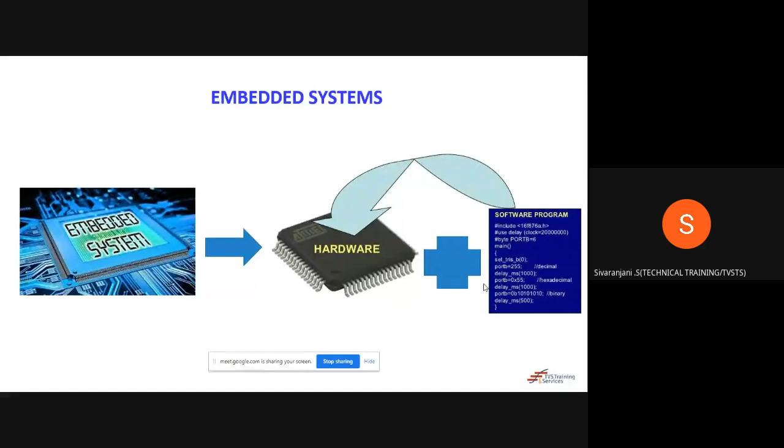So once we are getting into the embedded system introduction, we know how the embedded systems should function and what components should be present. The major important components of your embedded system: it should have an input, which we receive from the external environment via sensors, switches, anything. It can be a physical activity or an electrical activity, whatever it may be.

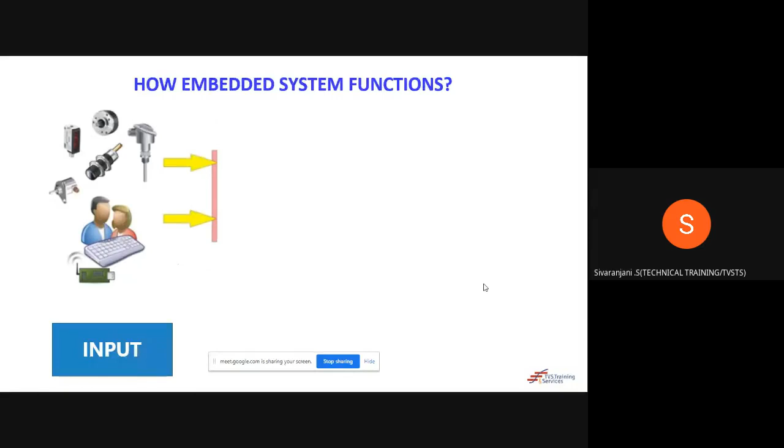The next step is the process element, which is your microcontroller, performing only dedicated tasks. Whatever input you receive from the external environment is given to this process element, but it will accept only electrical quantity. So the physical quantity from the external environment has to be converted into an electrical quantity, and only then given to the microcontroller. It is a semiconductor device, as we are all aware.

But because this semiconductor device will accept only a 5 volt voltage, that is a DC volt. So that is your microcontroller.

The third major functional part is going to be your output. The output can be any indicators. It can be actuators, it can be a display indicator, it can be anything. So you have an input from the external environment that needs to be processed via the microcontroller with some of the embedding elements, and that will provide you some of the indications as the output. This is all about your embedded system functions.

So can any one of you list some of the examples based on this explanation for embedded systems? Whatever we are undergoing in our day-to-day life, some may be examples of embedded systems. Can any one of you share from the participants' end? The electronic gadgets which we are using in our day-to-day life, which are based on embedded systems development. So can anyone of you share?

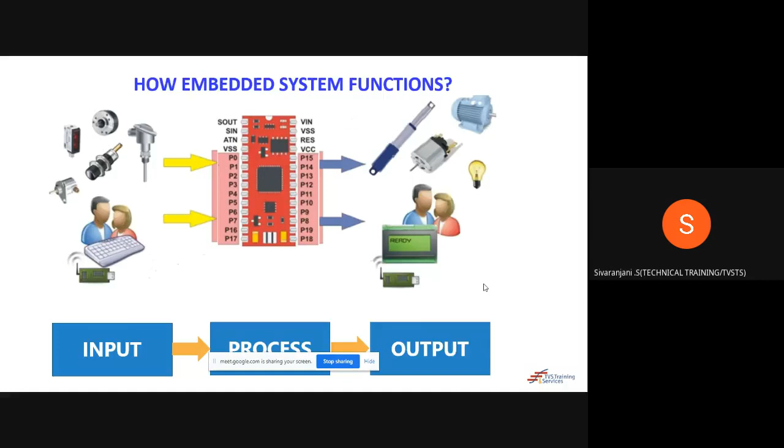So, for example, if we take one of the examples which you have given us, washing machine. When we compare this with the previous explanation, how will the input, process and output function with respect to a washing machine? What is the input you require for a washing machine? You require water, you require clothes, detergent, and the major thing is electricity. I have all these external environments with me, but what needs to be done? It needs to be processed, right?

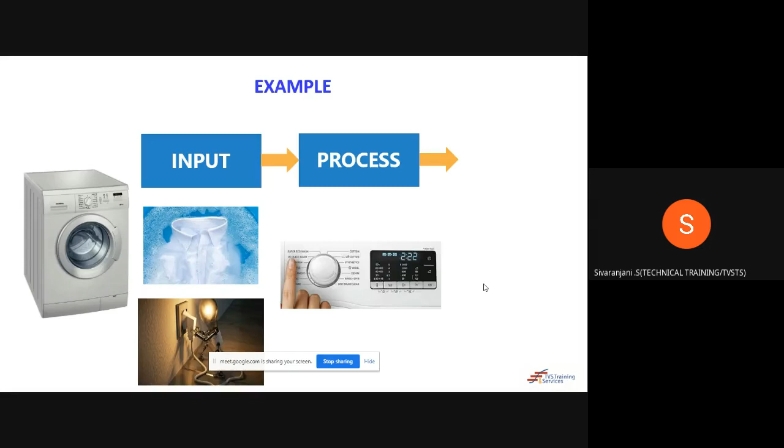So in the processing stage, that depends upon the input you are giving to the machine. For example, what type of cloth I am going to give. Based on that, I'll be setting up the mode, right? So the process element will take care of these things. If you're going with a cotton cloth, you will be going with some other mode. With respect to that mode, it will define the temperature as well as the time period it will take for doing the process. So all these things are under the process element.

So the microcontroller will take care of this selection. Whenever I'm going with knob switch mode 1 selection, it means it is going with cotton cloths. If I'm going with 2, it is going with synthetic. Maybe cotton cloth will require some more time to wash, but synthetic doesn't require that much time. So the process element is going to be the best judge for you. You have written a lot of codes, we will call them instructions, for different tasks. So according to your selection, you are going to process the functional part. That is all about your process element.

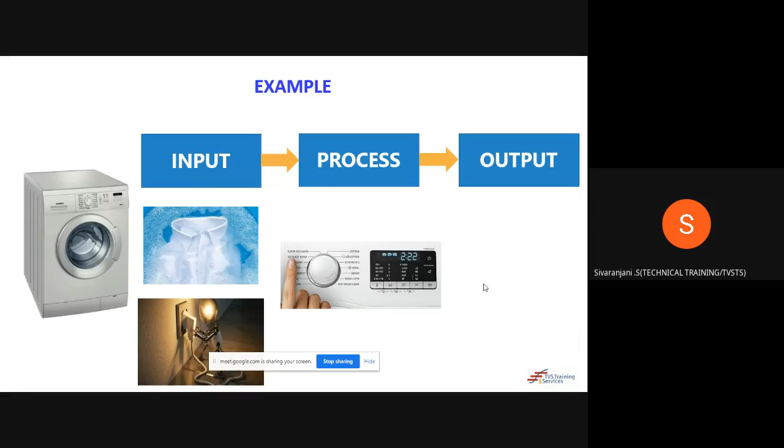And what is the output you will be getting from this? You will be getting washed and cleaned clothes from the washing machine. That is your output. So this is the best explanation for your embedded systems, how it is functioning, how the input is taken, where the processing part is done, and what is the output you will be getting. I hope you got some explanation about this.

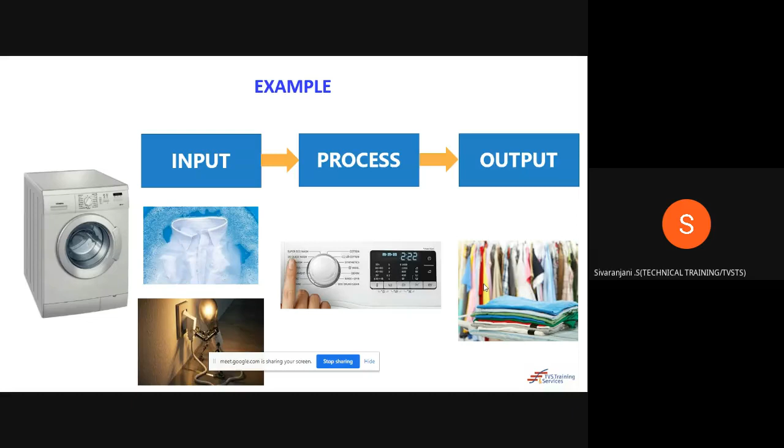Let's get into the design part of it. We know what an embedded system is, how it is going to function, what are all the major blocks in this. So now what do I need to do in order to make a system like this, how am I going to design it? The very major part of the design aspect is you should not design the system like a general purpose computer. Like a laptop or computer you have, that is developed for generic applications. Any sort of software, you will be able to load into it and work on it, right? But if your system is dedicatedly designed for a particular function, it should be performing that function alone, right?

So we are talking about embedded systems, which are for dedicated applications. When you are going to design a system, you should keep in mind it should not be a general purpose system, it should be a dedicated purpose system. So in order to go for this dedicated purpose system, what are the two things you need to talk about? We already talked about an embedded system being the integration of your hardware and your software. So these two things have to be designed, not independently, but dependently. One is dependent on the other. That's why we say hardware and software should be co-designed. So I'm not going to take a software environment which is independent of hardware. I'm going to select a hardware.

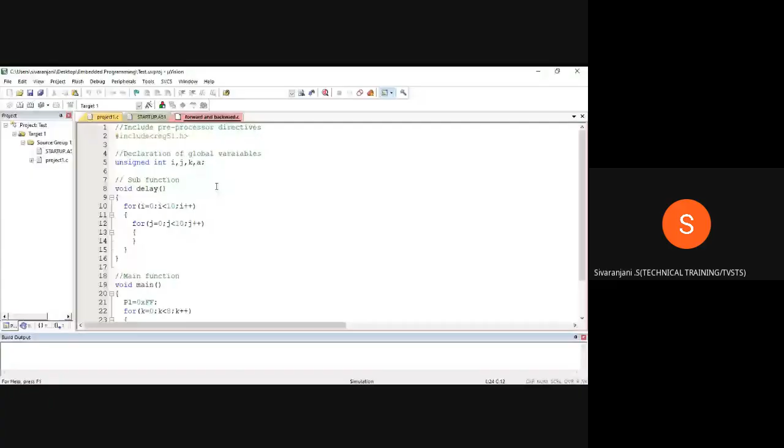Hello, ma'am. One second, ma'am. I'm taking it from the software itself. Maybe that will help you, because they are not able to see. Somebody is presenting. Can you please stop it? Mr. Thirumalai, can you please stop it so that I can present it? Thank you. You are able to see it, ma'am, now? Yeah, we are able to see, ma'am. Okay. Thank you. I'll just add the file again and show you again. So how are you going to shift it?

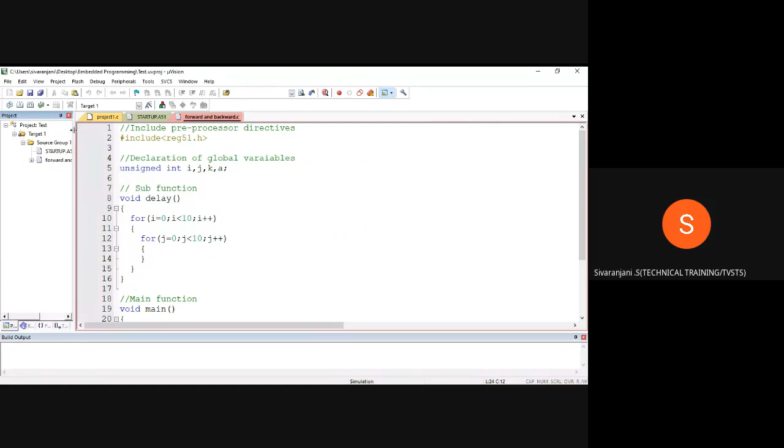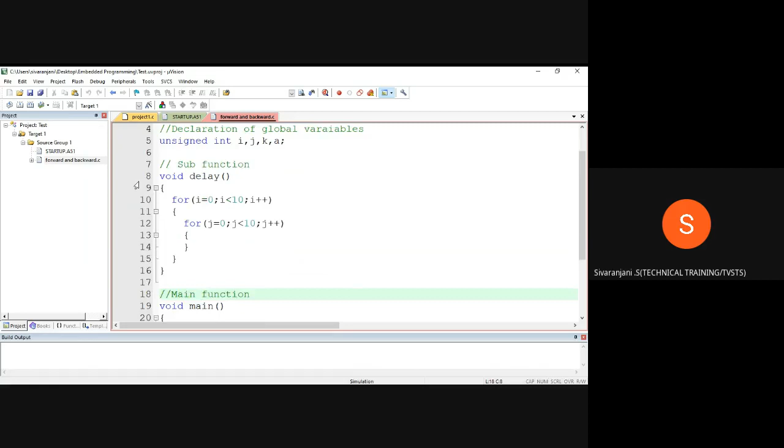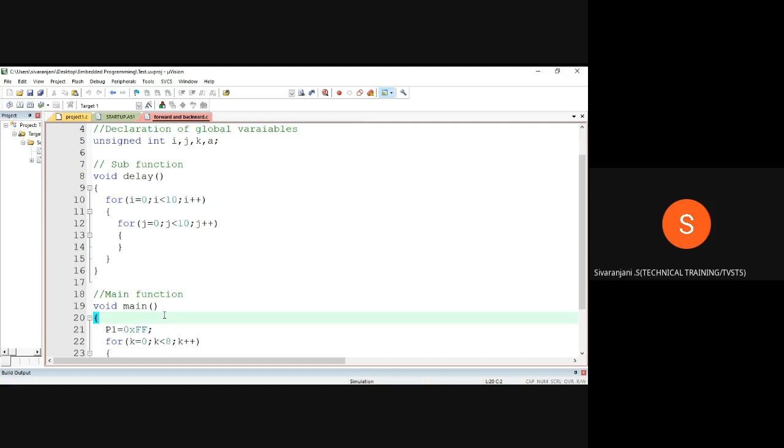See, I have added this forward and backward file. Whatever file I have added here, you are able to see it. So it is about the delay function. After the delay function, I am having a main function. So here it needs to be shifted, right? So I'm going to debug this particular program.

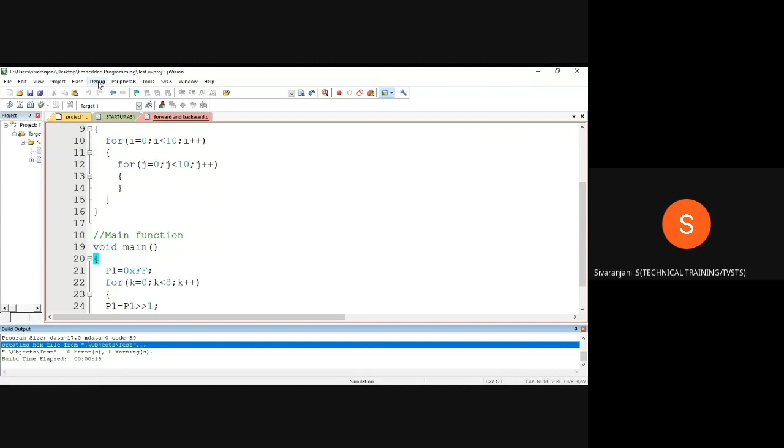I have rebuilt it. Yes, it was compiled, linking, and it has created a hex file. You are able to see it has created a hexadecimal file. Now I'm going with debug session. Debug port 1 alone I have taken. Are you able to see it clearly now? Shall I zoom it? Yes, ma'am.

Okay. Now I go with step over. The statement which was executed was P1 = 0xFF. So the port 1 is in 0xFF. Now the for loop needs to be executed. If I give F10, the for loop was executed. This particular statement was not executed yet. Now it needs to be executed.

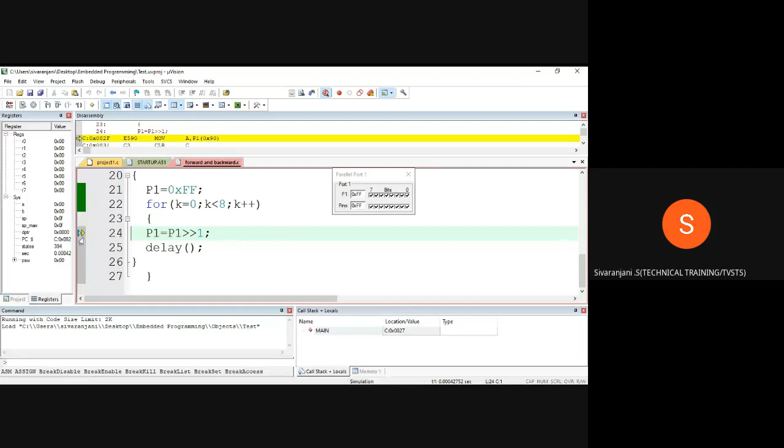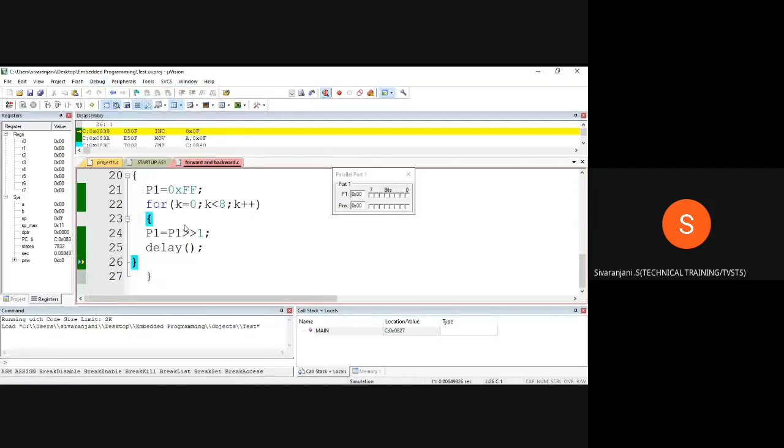Once it was executed, one bit was in off condition. If I go again, the second bit will be moved. Third, fourth, fifth. So bit by bit, you can make it on or off. That depends upon the programmer. For example, if I give 0x00, I'm making it 0x00. So what will happen? Just see. First, you need to build the target. Once the target is built, you can go with the debug session.

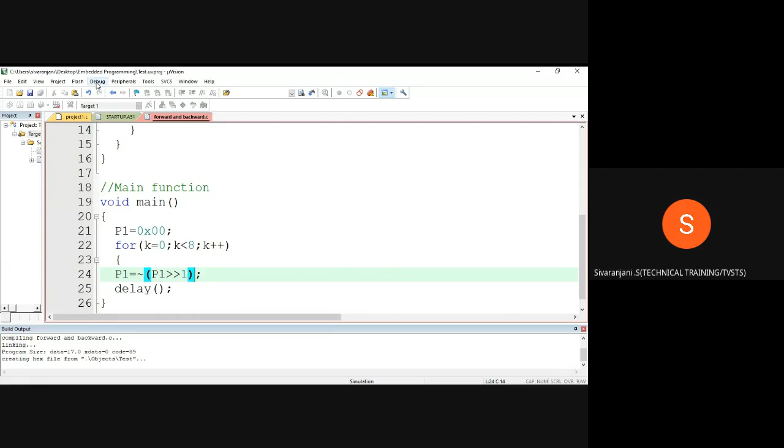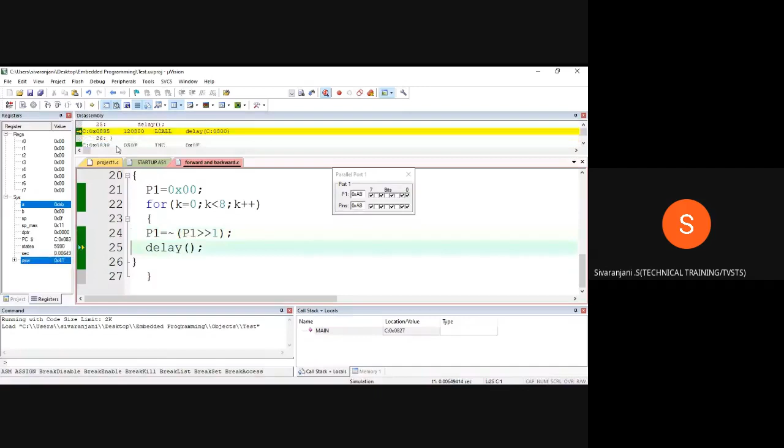And here I'm giving whatever is not there, that will be converted. Compiling, and after compilation, it has linked. Now the hexadecimal file will be created. Now I don't have any errors. Now I go with debug. The same thing I'm going to execute. Step over, F10. You are able to see bit by bit. A difference was there, right? So you can simulate whatever scenario you require, according to your requirement. So this is how you can debug with the software environment.

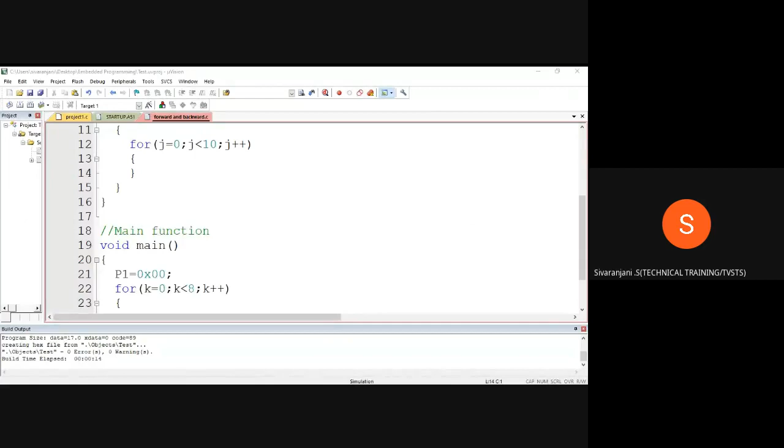So I'll go with the presentation again. Is it okay, ma'am? Somebody said it's not visible. Now is it okay? Yes, ma'am. Very clear, ma'am. Okay. So shall I go ahead? Yes, ma'am. Is the PPT visible, ma'am? Yes, now.

If I have a scenario like this, I need to design a system for a traffic light control. What needs to be done? How many inputs are required? How many outputs are required? If it is a 4-way road, how many signals will you have? 1, 2, 3, 4. So 4 roads. So you'll have 12 LEDs, right? Each lane will have 3 LEDs: one for stop, one for slow down, and one for go. So 4 into 3, 12 LEDs are required.

Each port will have only 8 pins. Then what will I do? I'll go with the second port. Port 0, if I take 8 pins, the remaining 4 pins I can take from port 1. That depends upon the hardware; the software engineer decides from the hardware diagram received from the hardware engineer. According to the hardware requirement only, you are going to write your program. So now, how to create it in a simulation virtual environment.

Ma'am, you haven't shared your screen yet. That's what I asked, ma'am. Is it clear or not? One second. Okay. Is the screen visible now, ma'am? Yes, ma'am. Now it's there.

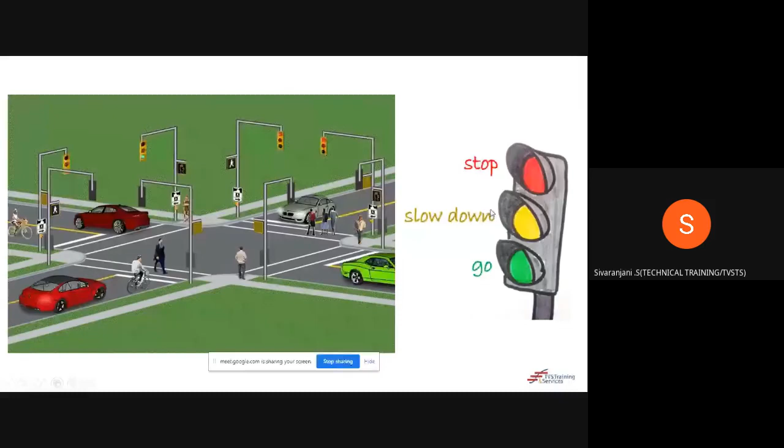So I talked about this. You will have a 4-way road consisting of signals. Each lane's signal will have 3 LEDs. So totally 12 LEDs are required. How are you going to design it? Previously I talked about how to simulate with the IDE, integrated development environment, and how to debug it. So now your program is ready and you have simulated it in the programming environment. Now, how do I check with the virtual environment?

For this example, I have taken this virtual environment, because previously you learned how to debug and how to code your logic; everything is done there. Now we are getting into the virtual simulation tool, which is Proteus. So how am I going to do it? I have taken just a 1-lane example, because I don't have enough time to explain all 4 lanes.

So where to get it? We have to pick from the libraries. In this library, you have to select AT89C51, which is the controller. So I have selected that. I'm going to give OK. If you give OK, it will be added on the left side of your screen. You are able to see it.

Now, after that, I require a traffic light. So I'm just giving traffic light. The traffic light was selected, which has 3 inbuilt modules in the virtual simulation tool. Both of these are now added to my module. Now I just have to drag and drop here. I'm just taking the traffic light, dragging and dropping it here.

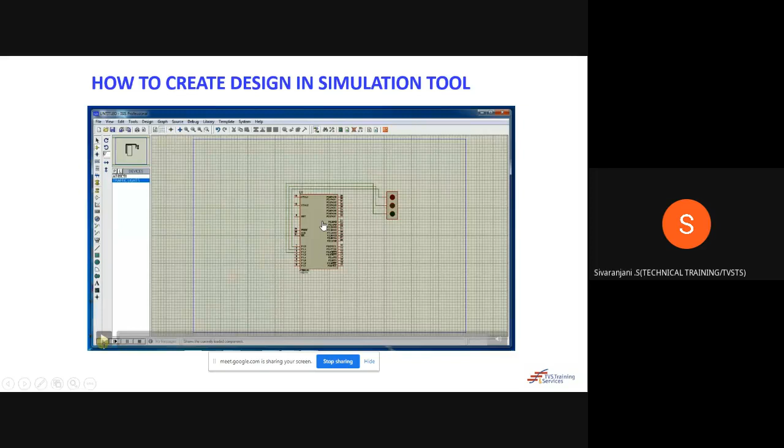Now, after implementation and virtual demonstration, once you are ready and everything is okay, you can go with the proof of concept demonstration. This is how you have to demonstrate it. You can take all these parts and demonstrate it with the proof of concept kit. After it is done, you can go with the realistic design of the system.

I hope you are able to see the difference in the different lanes. Lane 2 is in green, so they can go. Now lane 3 will change to green and the others will be in red. This is how your system has to be proved. This is the design and your implementation part.

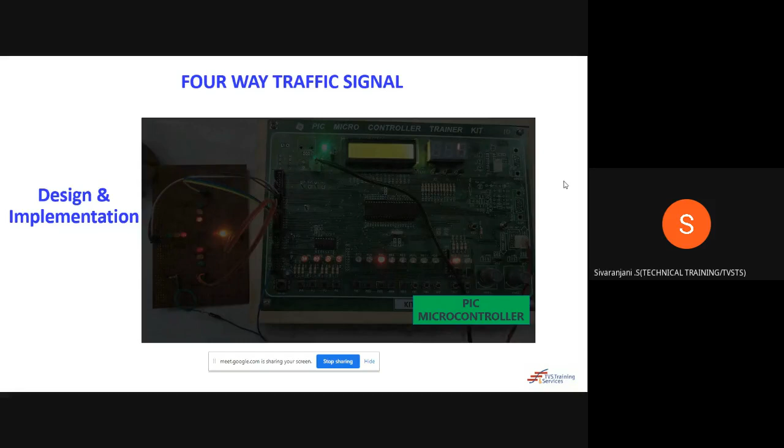Now shall we go to the Q&A session? Kalimani ma'am, can you please help me in getting the answers? How do you represent comment lines in programming and why is it required? Option C, ma'am. Thank you, ma'am. I've posted option C. Thank you, ma'am and sirs. Thank you for your answers. So it's C.

The second question: embedded programming is independent of the hardware. Is it independent of the hardware? False. Many of you have given the answer false. Thank you. False is the correct answer. And the next question: how many options are available to declare a variable in C programming? How many options are available to declare a variable?

Option A, ma'am. They have given option A, most of them. No, it's not option A. It should be option B, because your variable can be a global variable or a local variable. Any one of them is possible. So local variable or a global variable. So its answer is B.

Thank you. And the last question is, what kind of extension file is to be loaded to the microcontroller? Please post your answers. Option B, ma'am. Most of them have posted option B. Option D, last option. D. Yes, yes. Thank you. So it should be a hexadecimal file, but we are writing it in .c extension that will be converted into a hexadecimal file with the help of the compiler which is present in the integrated development environment.

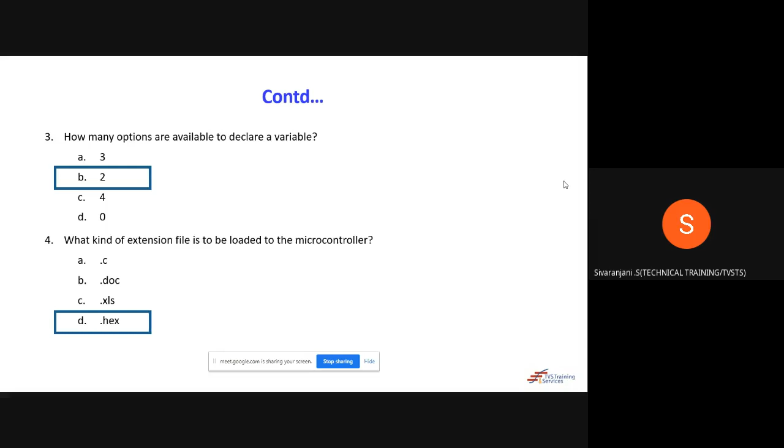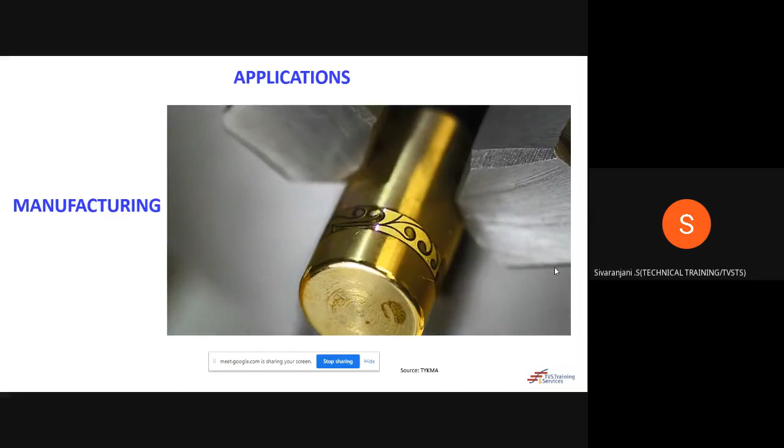I hope from this video you have understood how embedded is contributing to manufacturing applications. Manufacturing industries are using embedded programming for their applications also. For example, if you take the automotive industry, they are using this laser technology for printing on the rim as well as on the switches also. These are all automotive parts which are prepared with the help of embedded by the use of laser technology. The laser light is controlled with the help of embedded systems: when it should be on, when it should be off, what intensity it requires. So all these things are taken into consideration, and this technology is used in the automotive industry.

The same laser technology is used in packaging applications also; you will be able to see some of the components here with some packaging parts. These things which are printed have to be a permanent marking. It should not be temporary, like what you see on your keypad mobile. When you use it for a long time, what will happen? The printing on the keypad will go off. This is because it is based on screen printing technology. But if you go with laser, it is going to be permanent.

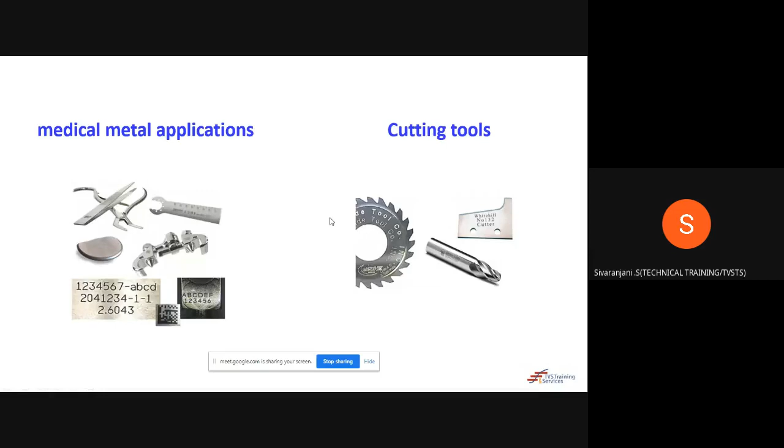All these things are possible only with laser, because it is more accurate, because embedded is going to be a dedicated task performer, and you will be able to achieve the time delay with the timer and counter present in the microcontroller. With respect to that, you will be able to achieve a perfect time period. For example, this particular part has to be engraved only for a period of 0.5 microseconds. It will be engraved for 0.5 microseconds only, because the input the actuator receives is from the microcontroller. It is able to control the device on its own with a predetermined time period. That's why we are getting into embedded for most industrial applications.

We go with keypads, right? If you go with permanent marking of these keypads, you will be able to perform. But when you go with screen printing, it will go off over a period of time. When you go with costly mobiles, this marking will be constant. It is because of laser technology.

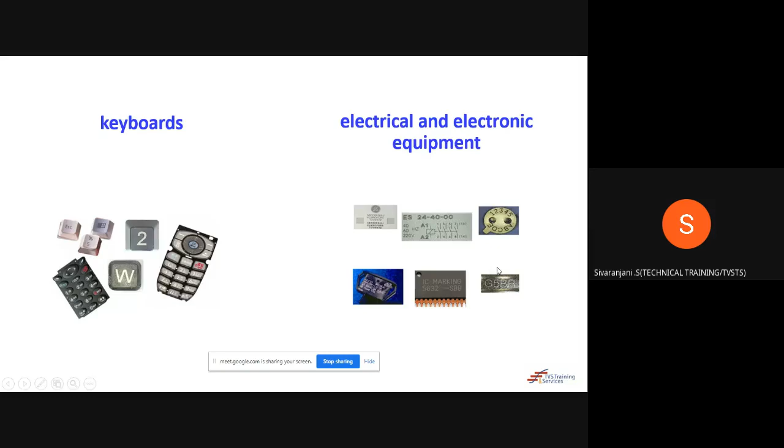And with electrical and electronic equipment, as most of you are from the electrical and electronics discipline, you have seen the IC marking, which is based on laser technology. It is a permanent one. It will never go off. How will you find the number of the IC which I'm holding in my hand? You will be able to see it on the IC top, right? It is based on laser technology. Everything is working on laser, and you will be able to see some promotional gifts also, and names which are engraved on wood or any other material, which are of permanent nature.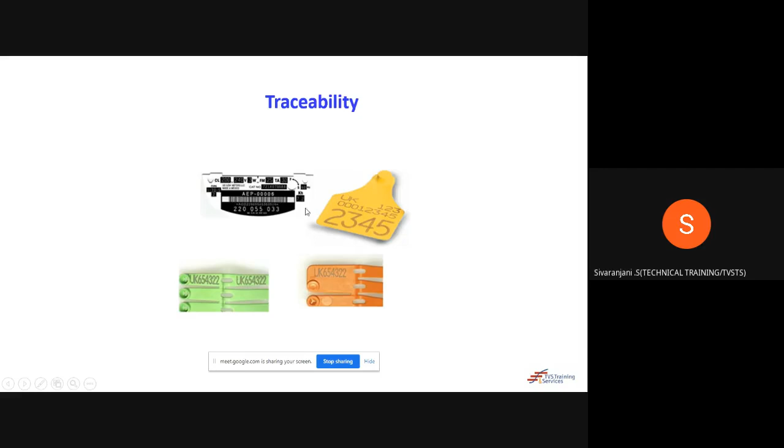You can go with engraving technology. And traceability, like your barcodes, how it is generated, can be done with the help of laser technology, because this barcode has to be a permanent one, so I can go with laser technology.

So now I have told you how to cater for the manufacturing application in different sectors. Now in order to achieve this, I want to make an engraving and marking machine with embedded domain. What are all the requirements I will be able to have? What needs to be done to design the system? Anybody have any thoughts on your mind?

I have told you this is how my requirement needs to be, because the customer will share the requirement only to you, since you are the solution provider. You are going to provide a solution based on the technology as the subject matter expert. So how are you going to provide it? Anybody has any views? I told you it is going to be laser based. Any idea?

Am I clear in my question? Has everyone understood my question? Yes ma'am. Anybody has any idea? Can you please post your answers on the chat box?

Any answers? Camera-based bar printer. Ma'am, sorry ma'am, I have a question. That's a doubt, yeah sure ma'am. I can help you, tell me.

In case of printing, we are using laser ma'am, but for reading the barcode, what are we going for? Sorry, you are talking about reading the barcode. I'm just talking about how to create a barcode with laser. Okay, you are asking only about the printing of the barcode. Yes, I'm not asking about the reading.

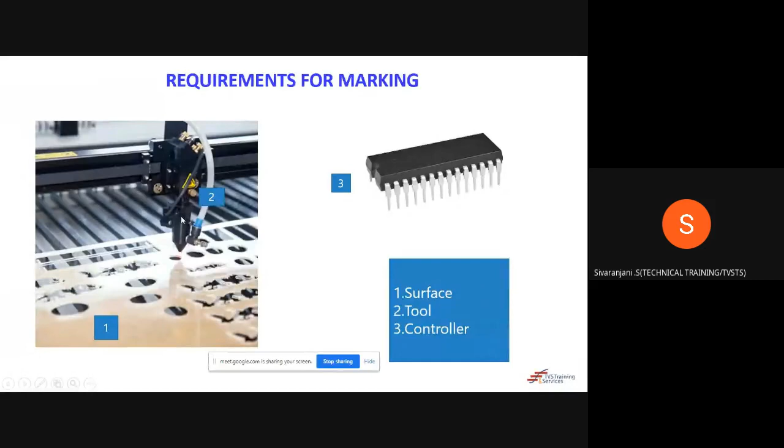And what is the role of this particular brain of the system? What is it going to do? I told you this is majorly going to control the element, which is your laser. So it is all about what parameters it needs to control. It needs to control the moving direction - either it needs to move in X, Y, or Z. That depends upon the controller, whatever command I'm going to give.

And what is the intensity I require? Either it needs to be much intense with respect to some area, some area can have minimum intensity. That can also be controlled via your microcontroller. And the major third part is the speed of movement - how much speed I require.

It needs to move. For example, I told you clearly, you can use the same machine for engraving as well as marking. First, you should understand what is engraving and what is marking. Marking is nothing but, just like having a paper and pen and a scale with you.

If I ask you to mark the margin, you will be doing it, right? If I want you to engrave it, you need to do it a lot more times. So with the same scale and pencil, if you do it again and again, that particular portion will be removed. That is nothing but removal of a portion of a particular metal or piece, which is engraving. With the marking machine itself, you will be able to do engraving, like how your rings are engraved with your names. It is removal of the particular metal from the portion with whatever character I require. So this is about the role of the controller.

Same machine I'm using both for marking as well as engraving. These are all the 3 major parameters I'm going to control with the microcontroller. With respect to that, I'm able to operate the same machine as an engraving machine as well as a marking machine.

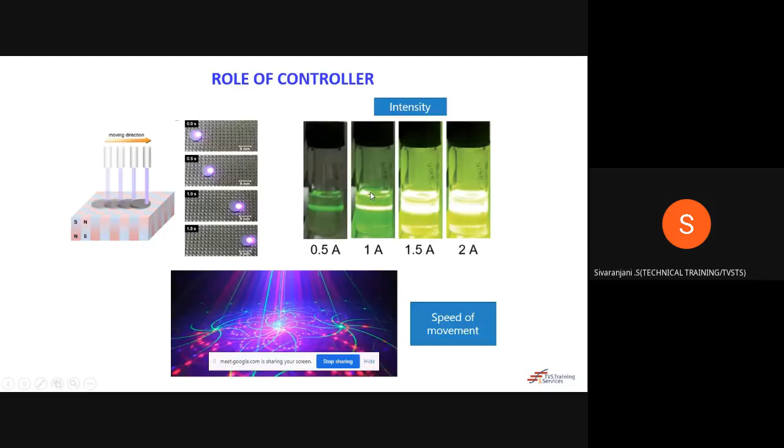So this is, if I'm getting from the customer, I need to mark my logo with the machine. So how am I going to do it? First, you need to understand what are all the inputs, this is the requirement from the customer, and this is the hardware which was designed by the hardware engineer. Now you need to write a program for operation of this hardware. How are you going to do that? First, understand this particular thing.

How many input elements are there? How many motors are present? How many switches are present? How many sensors are present? All these things you have to take into consideration. Read the hardware structure properly.

For example, if you go with this, I'm having an X switch here. This is your X plus switch and this is your X minus switch. If the laser is moving in the forward direction, means from left to right, it will be going in this direction. Once it reaches its end, it need not go further, right? So what protective equipment do I have? A limit switch here. If the limit switch is hit, what happens?

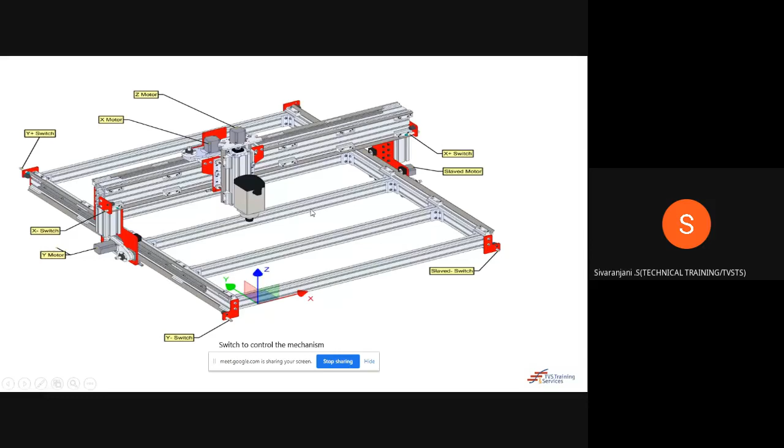I need to come back to my original position or home position, or I need to stop. This is the information which we need to give to the microcontroller by means of programming. If I want to do this particular part, this particular logo engraving, TVS training and services, there was a space.

Between TVS as well as training, and the 'and services' should come in the second line. So after training is completed, what needs to be done? It needs to come back to the second line. So that means it needs to come back to the minus X margin, and it needs to move in the Y margin for some distance, and it needs to come to this particular position and print it.

So if suppose I want to print this itself, T, how will T be done? T has to move in the right direction. After T is done, it needs to come back for half the distance here, and during that period it should be in off condition. If the laser is in on condition, then what will happen? It will be engraved again. Then the portion of T compared to this portion, what will be there? It will be much thicker compared to this, right?

So all these things you are considering, you need to consider during your programming. Maybe I will play you a video of how this is done so that you can have a better understanding of this.

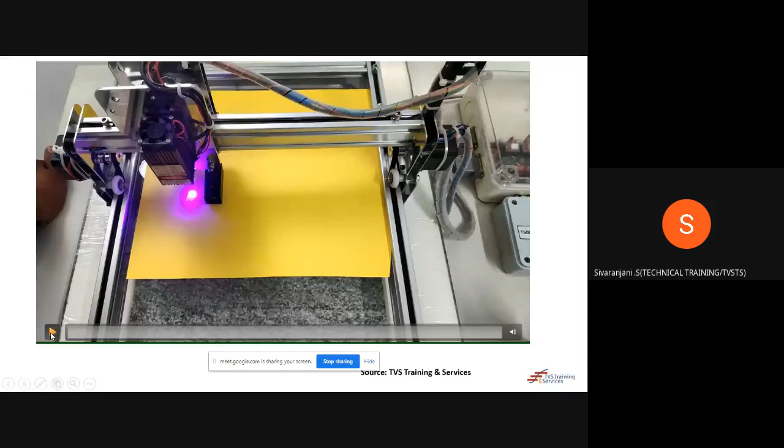There was a switching between your on time and off time, you are able to see. So this is how your laser will be moving from X to minus X or minus Y to plus Y. Depends upon the programmer, you need to test it a lot more times to achieve your task. It should be in the center of the paper. So all these things are done with respect to your programming environment. I'm playing it again.

For example, this S and this S needs to be in the same font, right? It should not differ. So how do I need to do that? This S should be the same as this one. Whatever distance or measurement I have given for this S, the same measurement I have to give. For example, between E and S, I have given some space. During that space, the laser should not be in on condition. So all these things are taken into consideration when you are going with the programming part.

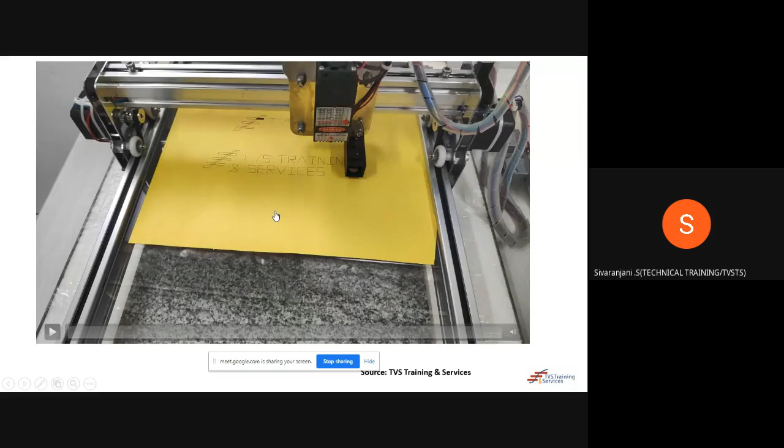Shall we go with one more case study? Are we having time? Yes ma'am, you can go. So the second, are you having any queries with respect to case study 1, laser marking and engraving machine? Anybody has any queries?

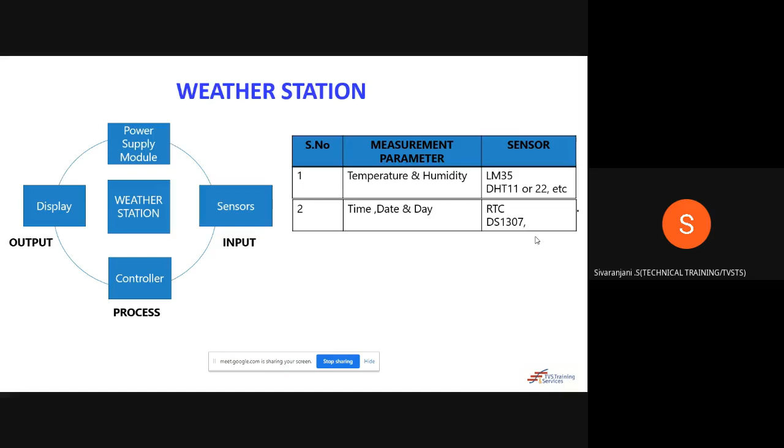So how are you going to design the system? We talked about the virtual demonstration, right? I have selected the hardware, I have selected all the components for the hardware, I know what is the controller, I have developed the code - everything is ready, but I cannot implement it in real time.

The very first thing I need is to interface it with a virtual environment, to find out how I am able to meet the target and the requirement for the customer. Once that is done, then you can go with real-time testing. First, let me explain the virtual environment testing.

So here, first, I'm going to interface a microcontroller with a 7-segment display, with DHT11 as a temperature sensor, which will tell you the temperature. The controller I have used is PIC16F877A, from the microchip family. For this I have to use MPLAB-X IDE. The IDE differs according to the hardware which you have chosen.

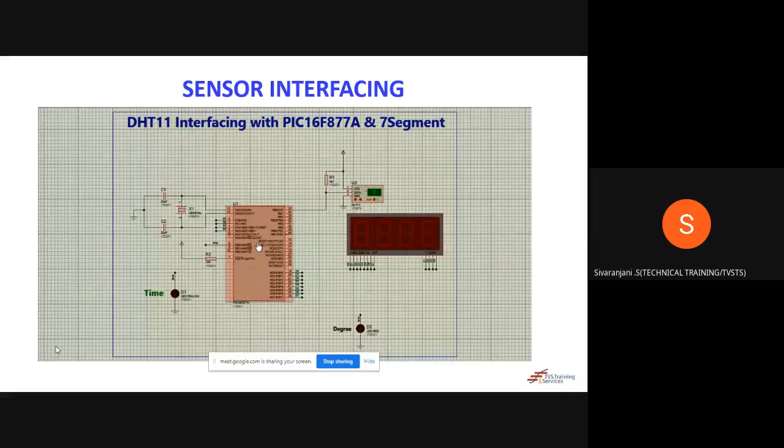I'm just demonstrating how I have interfaced a DHT11 sensor. You can see the DHT11 sensor there. I'm going to load the hexadecimal file. Now I'm going to play. So right now the temperature is 27.

The sensor will provide data according to the physical environment. Now I'm virtually selecting it - I'm going to change something in the environment, that is the sensor. I'm practically changing it, and I should be getting the same thing. This particular sensor is feeding data to the microcontroller.

From the microcontroller, I'm getting the information via the digital display. So if I change it, it should give the same value here, because this is virtual environment, not physical interfacing. That's why I've changed it - I'm checking to see if I'm able to observe it. So once the data is processed, I have changed it to 31.

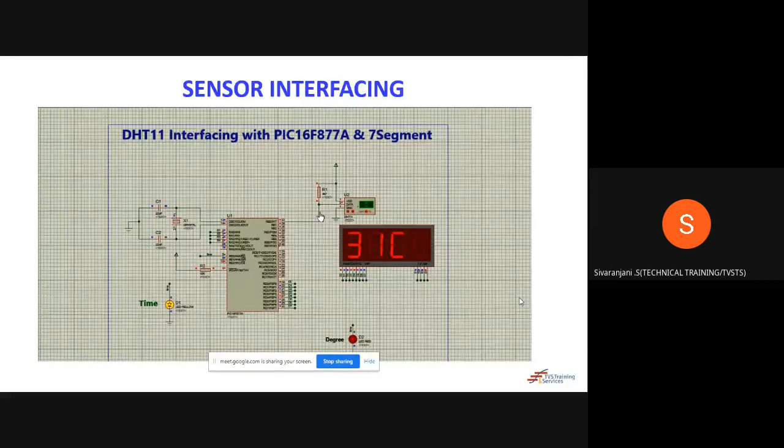Now let's see if I'm able to get 31 or not over a period of time, because it will take some time for all this to process. Yes, I'm getting 31 degrees Celsius. So whatever input from the sensor I give to the controller, I'm able to get the same data from the virtual environment on the digital display, that is the 7-segment display. Then my sensor interfacing is working perfectly.

And the second part is I'm going to work with the real-time date and time. So now let's check with the RTC - how am I interfacing it? I'm selecting the same RTC hexadecimal file.

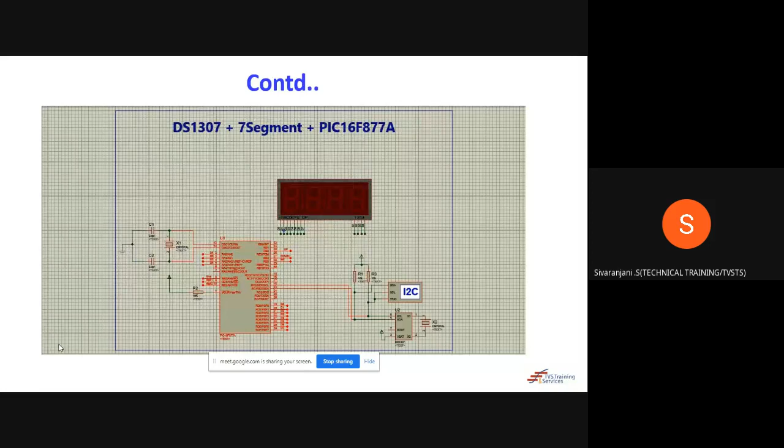See this, I'm checking it. Right now the time is, here it's showing 12:22, 12:23. There will be a delay of minimum of 10 to 15 seconds. Yes, you are getting 12:23. So whatever time I have given, I'm able to get it on the particular 7 segment.

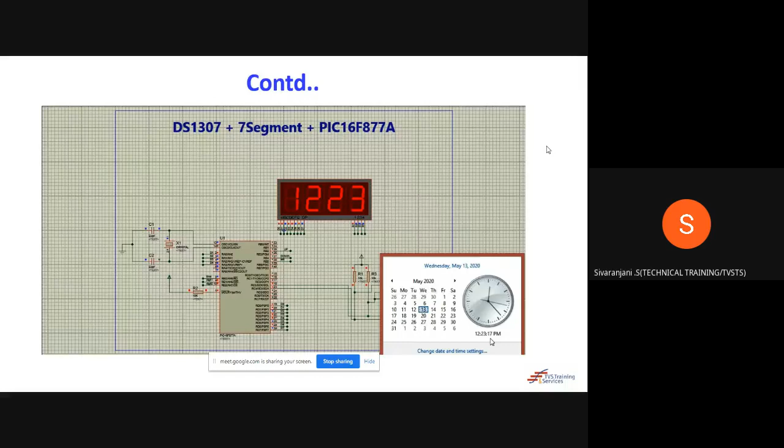So I have tested it in virtual environment for both real-time data from the sensor as well as from the RTC clock, that is your real-time clock. Both are perfectly working. Now I'm going with the real-time demonstration. I'm going to test it with respect to the display. See, the display which I have used is an LED display, P10 LED display.

In this, first, what is the sequence which we have arrived at? First, a welcome message will be given. After that, the date, time as well as the day will be shown. Finally, your humidity and the temperature will be shown. This is how I have programmed it, and before the demonstration I have virtually demonstrated. Once virtual demonstration is done, then I can go with the hardware design with real-time implementation.

So you are able to see the sensor here. This is the DHT11 sensor and this is your DS1307. So it's giving you time, as well as day and date will be shown. This was the date and day. And what was the temperature? And what was the humidity at present at that time?

This is how you have to design a system. First, select hardware. Again, repeating, select your hardware. According to the hardware, select your IDE. Then write your logic there. Debug it in the software environment. Then go for the virtual environment. Interface your programming with the hardware. Once it is done, yes, I don't have any error. My program is bug free. Then you can go with the real-time implementation of this system.

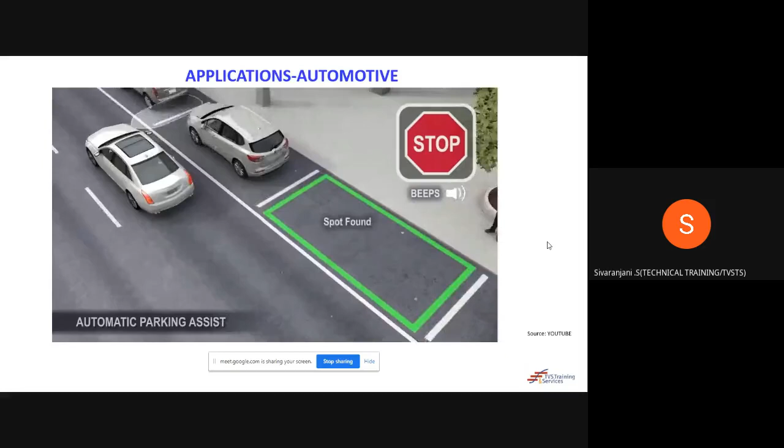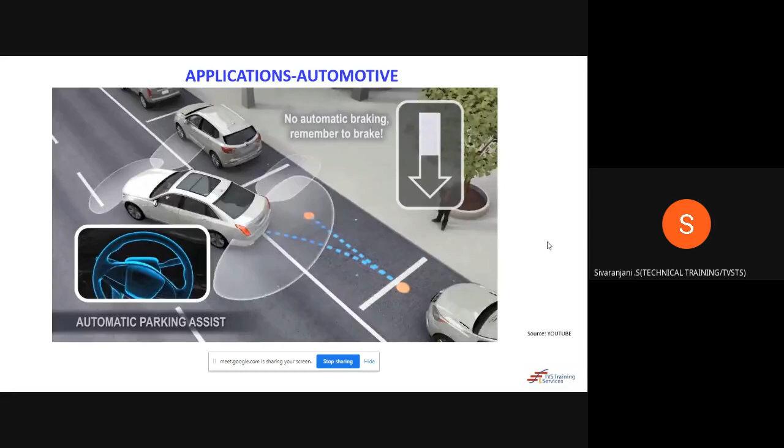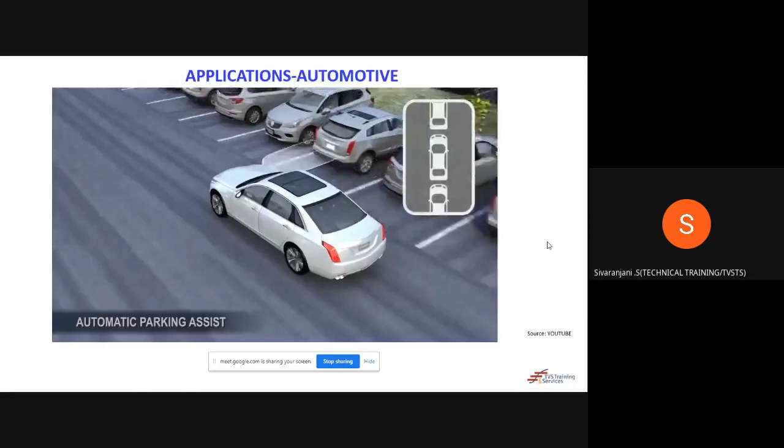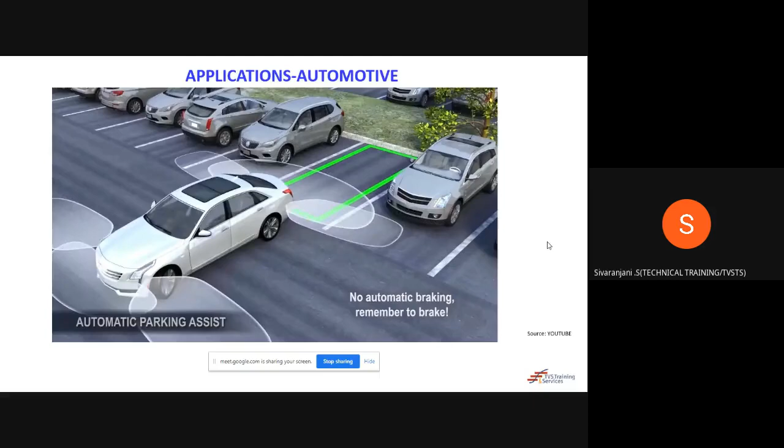Automatic Parking Assist automatically searches for and steers the vehicle into an available parallel or perpendicular parking spot. The feature uses multiple ultrasonic sensors. At low speed, the front side sensors are used to search for possible parking spots. To begin searching for a parking spot, press the Automatic Parking Assist button. To cancel search, press this button again. To switch between parking sides, use the turn signal. After completely passing a large enough spot, an audible beep occurs and the vehicle system display will notify you when to stop the vehicle. When instructed, shift to reverse and remove hands from the vibrating steering wheel. Release the brakes to allow the vehicle to begin parking. A progress arrow displays the status of the parking maneuver. Be prepared to accelerate and brake as needed to avoid vehicles, pedestrians, or other objects. When changing gears, allow the automatic steering to complete before continuing the parking maneuver. When automatic parking is done, the system displays a message, beeps, and automatic steering ends. Shift the vehicle to park. Regular parking assist beeps or safety alert seat pulses will also occur during automatic parking. During the search process, press and hold the APA button to switch between parallel and perpendicular parking modes. If additional maneuvers are required, follow the instructions in the system display. Just remember, keep your hands off of the wheel while the system is automatically steering. And remember to brake.

So this is how your automatic car parking system works. So it requires some sensors to take decisions on its mode based on the embedded system. So what may be the sensors which it requires? For example, we talked about this functional block diagram again. So it requires an ultrasonic sensor on the front, on the rear, as well as on the sides. So it can be an ultrasonic sensor or it can be an IR sensor. It depends upon the user as well as the designer.

If I want to check only the parking spot on the sides, if you are going with parallel parking, not perpendicular parking. Parallel parking means I need to find only whether the spot is available or not. Then for that I can go with infrared radiation, that is your IR sensor. IR sensor will find whether the obstacle is present or not. So that is useful for it. But when I go with perpendicular parking, then I need to find the distance also.

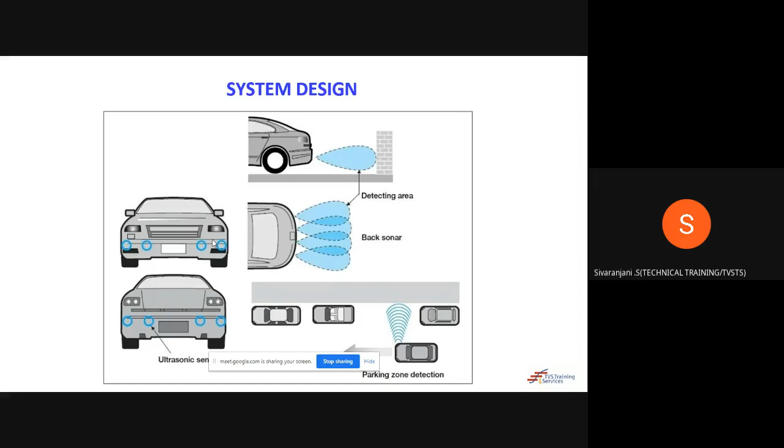Then for that purpose, you should have ultrasonic sensors on the sides as well as on the front and the rear. So it depends upon the requirement of the system design. The instance which I have given previously about your IR selection, where to select your IR and where to select your ultrasonic sensor. If we talk about this ultrasonic sensor, what is present in an ultrasonic sensor?

For example, if I take the HC-SR04, which has 4 pins. One pin will be the supply pin and the other pin will be the ground pin. As you know, all electronic components require a supply and ground. Other than that, it requires the input and the output pin, so trigger as well as echo. Trigger is going to be your input pin and echo is going to be the output pin. I talked about this ultrasonic sensor previously, how it is going to take these sound waves and convert them into distance, right?

It is going to give a trigger pulse. Once the trigger pulse is received, it needs to find how the speed of travel of sound was. Is it much faster or slower? If it is much faster, the distance is closer. If it is slower, the distance is farther. It depends upon the echo signal which was generated by the sensor. This particular ultrasonic sensor has a transmitter and a receiver. This transmitter always transmits a signal.

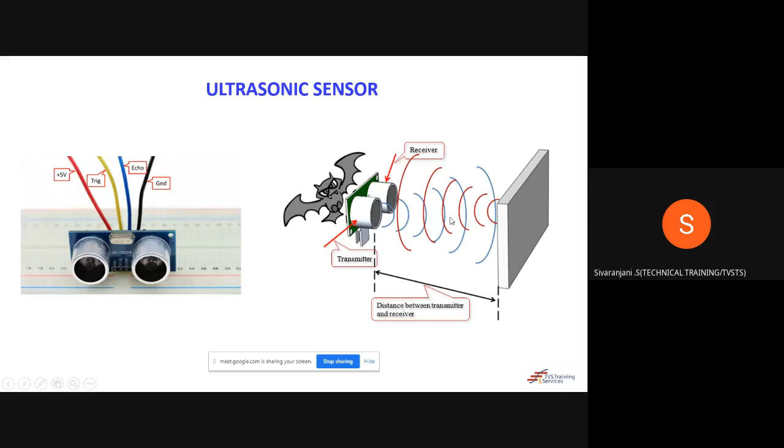If the obstacle is within the specified distance, the transmitted signal will revert to the receiver. That is the signal which will be received by the receiver as a reflection. Based on the time between the transmitter and receiver, the speed can be calculated. According to the speed, you can go with the distance calculation. So how are you going to do it? First you need to give a trigger pulse. The trigger pulse is given by means of your trigger pin. How are you going to give it?

A 10 microsecond trigger pulse is always required by this ultrasonic sensor. Once a 10 microsecond trigger pulse is provided by the microcontroller, this ultrasonic sensor itself will generate 40 kilohertz ultrasonic waves into the air, because it needs to collect them from the air again, right? For that, the electronic components present in this ultrasonic sensor will generate 40 kilohertz ultrasonic waves into the air.

Once this is done, it starts to take the time period from the echo pin, how much time it is taking to leave and return. The transmitter is giving and the receiver is going to receive. How much time it is taking to receive the signal, all these things have to be calculated. This you have to do with the test and measurement equipment. Once it is done, you will be able to convert this into distance based on the speed of sound in air.

So for example, based on this particular part you have selected, this ultrasonic sensor can detect up to 10 centimeters. If it is within 10 centimeters, it needs to stop the vehicle. If it is close to 5 centimeters, it can stop the vehicle. That depends upon the user, that is the programmer. I have programmed it, for example, if the obstacle is close to 10 centimeters from my sensor, it needs to stop. Or you can program it so if the obstacle is close to 7 centimeters, then it stops the vehicle.

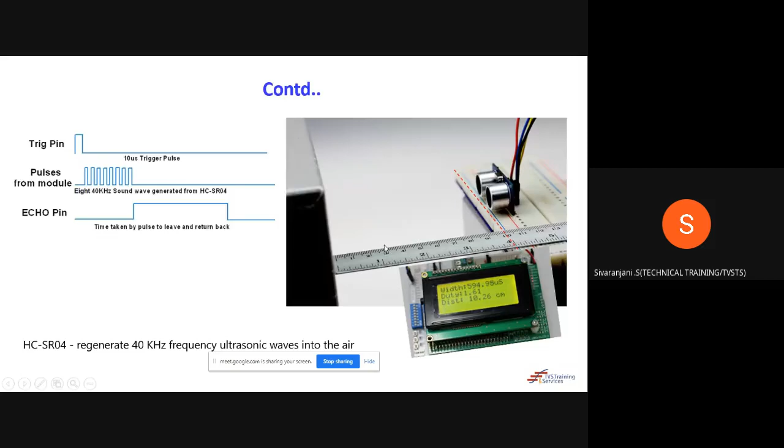But it can alert me when it is close to 10 centimeters itself. It can alert, that's all, it cannot stop. But when it is close to 7 centimeters, it can stop. That depends upon the programmer who is going to program it. You can just have an example for this.

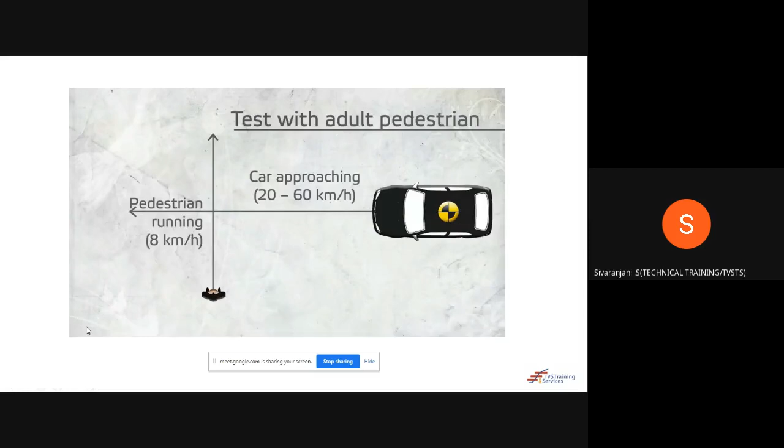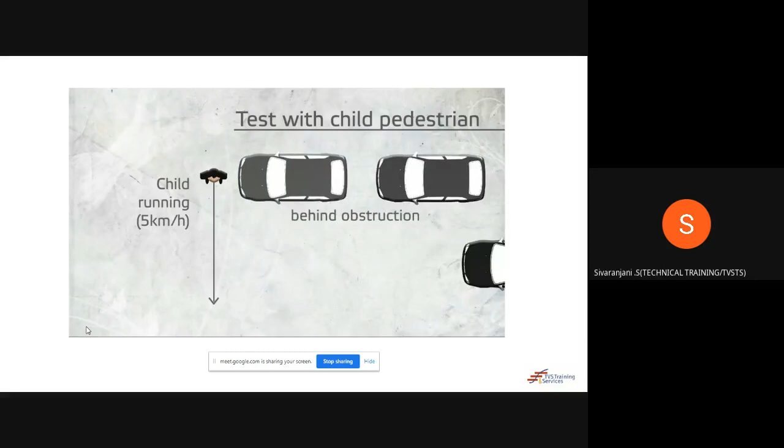This distance was much closer because it was programmed like that. It is much farther, closer. See, they are measuring the distance. I'm going to test for it. Yes, the car was stopped.

Right? So it depends upon the programmer. How am I going to program with the conditions? If you know the hardware properly, then only you will be able to test for the different conditions.

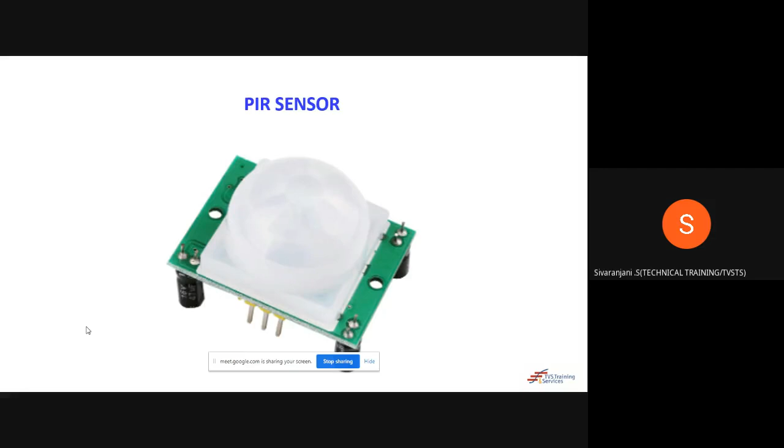So for example, you can go with one more sensor, which is a PIR sensor, based on the motion. If the obstacle which is present on the road is in motion, then it needs to be detected. You can use a PIR sensor, which is a passive infrared sensor working with a pyroelectric sensor. It has a pyroelectric sensor present on it, and it can have a widening lens, that is your Fresnel lens, which can widen the range of the sensor based on the requirement.

So how is this pyroelectric sensor going to work? It can detect the heat signature, that is, a thermal radiation based effect from humans as well as animals. It depends on that. I talked about the Fresnel lens. This Fresnel lens is oval, a dome-like shape, which will widen the range of your sensor. It can scatter the images.

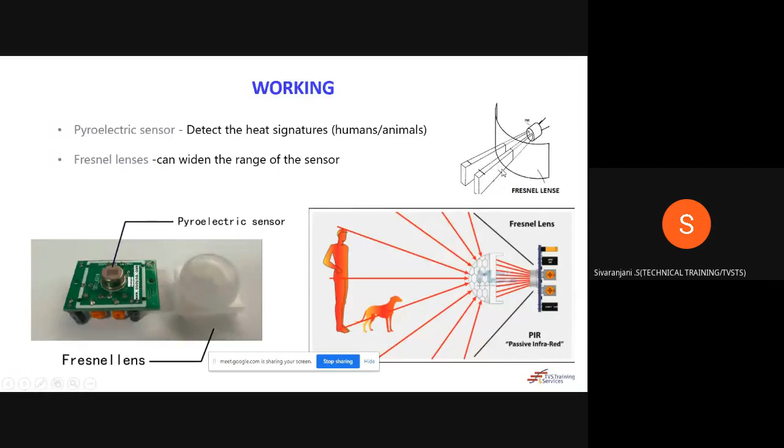So how is it going to work? It has two major portions. We will talk about these portions here. It is split into two halves for the detecting area. If one area receiving the motion is not in coherence with the second area, then there will be a difference in the signal. If both are the same, then there is no motion within this particular period.

For example, if the positive half cycle and negative half cycle are similar, then there is no motion in this particular area. If there is a difference between this half and this half, then there is motion present. If the radiation received by one of these two regions is greater than the other, then there is motion present. We will illustrate it with a

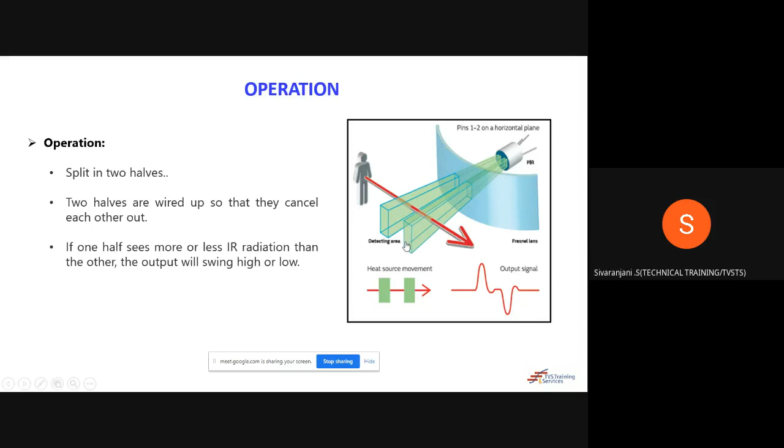demonstration. So with just Arduino, I'm giving you this particular part. See, what we have programmed is, if the PIR sensor signal is high, it needs to turn the LED on. Right now there is no motion, so the LED is off. Now I'm going to change the motion. If I change it, there will be a difference in the IR radiation between the two regions, right?

Just go and check. See, I'm going to change. There will be a difference in the radiation between the two halves, right? So if we change it, you are able to see the value is 1 and the LED is glowing. If I keep it as it is, then there will not be any change between the two areas. Then it will be in off condition. Again, it will go to off. Yes. So this is how you can work with your PIR sensor.

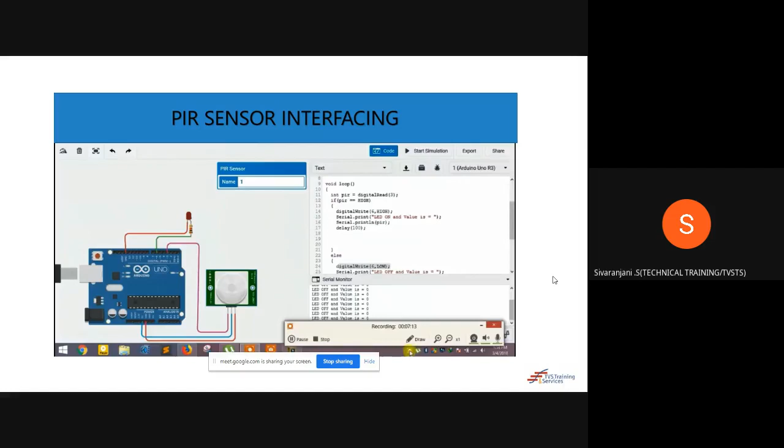So these are all the technologies which can simulate in a virtual environment before getting into real-time system design. What is the scope for engineers who become embedded software developers, and how will they be placed in the industry? All industries are now...

I'm getting a voice. Does anybody want to convey anything? Or can you please unmute yourself?

So if you go with automation, all companies are working towards automation, and the emerging technology we are seeing is Industry 4.0. Industry 4.0 works with the Internet of Things, and for the Internet of Things, the embedded system is going to be the backbone. Without this base, you can't get into the Internet of Things. If the Internet of Things is not there, Industry 4.0 is not possible. Hence, embedded is going to be the blooming technology on the industry side. So this is my conclusion.